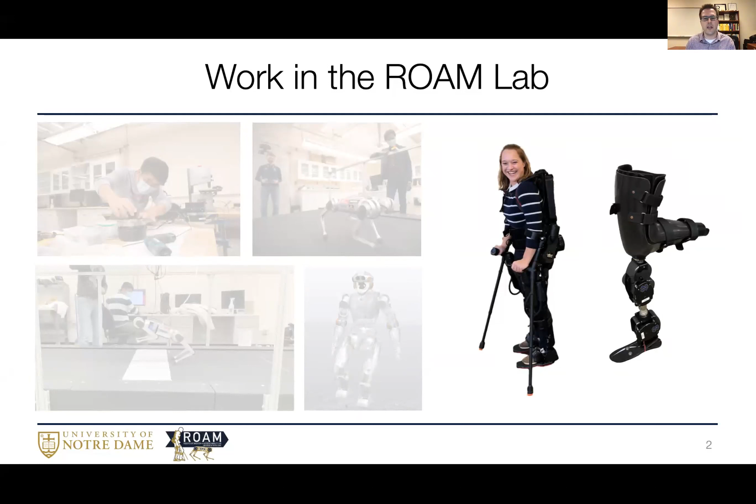Aside from both of these areas being united in the presence of legs, I think the challenges facing these systems are really representative of the ones facing our next wave of robotics applications more broadly. So if we think about the first wave of robots, perhaps the ones Karthik was working on at the beginning, these robots have made a phenomenal impact on the industrial assembly line, where they're complicated to control, but we really don't want them to be around humans.

They can be quite dangerous. We've seen robots more recently coming out into the real world, but most applications in what I'd call the second wave of robotics have been very much look-but-don't-touch by design. We have drones participating in inspection and surveillance, but hopefully not coming in contact with those objects, and very much likewise with autonomous vehicles, we don't want them to come in contact with humans.

This is very much in contrast with what I see as the next wave of applications for robotics, where we want these systems to be out in the world with and amongst us, helping to amplify and restore our human capabilities. So in terms of the challenges we face there, I see them as quite different, whether we're working with autonomous systems or ones interacting around humans.

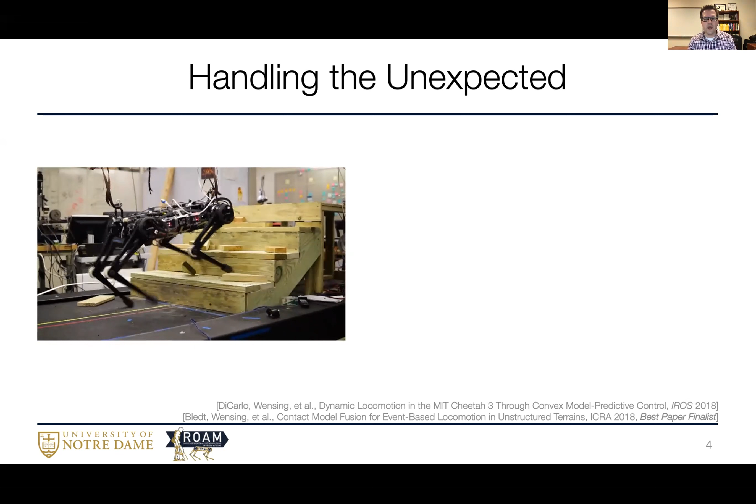So first, thinking about autonomous legged robots, I think the main challenge is just handling the unexpected and all the complexity of the environment out in the real world. We've made some phenomenal progress on this recently. Here, the unexpected for this robot is that it doesn't know these stairs are there, but the control policies and methods have been tuned up and trained so that they can work in this particular environment.

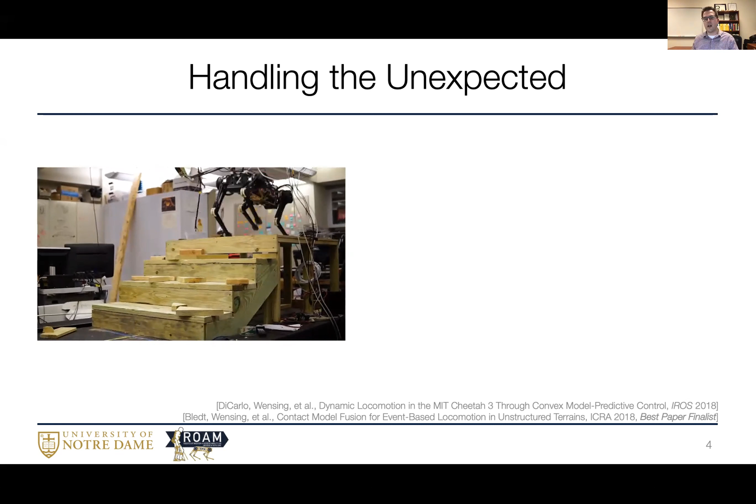But my overall hypothesis is that as we start to send robots out into the real world, whether they're supporting our troops, going to a disaster zone, the scene of a fire, or into our homes, we're never going to be able to prepare them for everything they'll see. Instead, our robots need to be able to reason through the consequences of their actions so they can devise creative solutions tailored to the situations they find themselves in. That's the main challenge and need for getting these robots out into the wild.

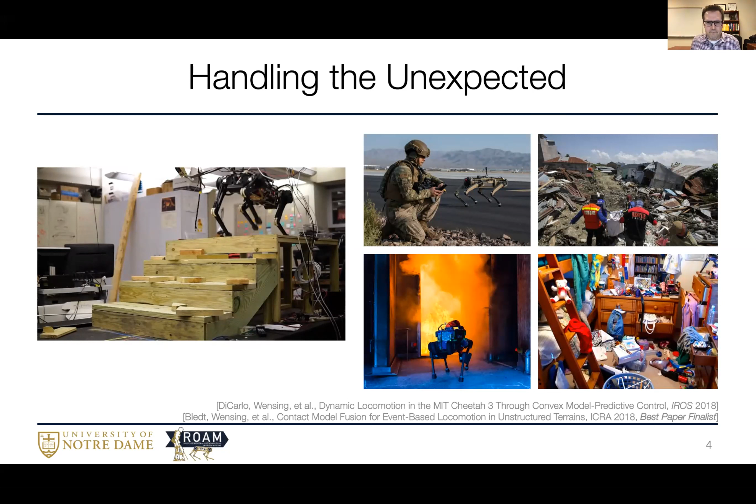I think it's very different when we think about human-robot interaction applications, and I think we have a bit of an inflated sense of the state of the art here.

Based on some of the things we see on the big screen, here's our friend Iron Man, and somehow his suit just knows that he wants to stop flying. It just knows that he wants to transition from walking on level ground to walking down these stairs to help him accomplish that. That's very much in contrast to the state of the art.

Here's one of the phenomenal systems we've worked with, the Ekso GT exoskeleton from Ekso Bionics. Here the motions just aren't quite as fluid, and that's because this device isn't really able to get into the mind of the human and pick up on their goals and desires as they walk through the world.

One of the challenges here is that everyone's gait is different. If you see your friend on the opposite side of the quad, you can tell it's them just by looking at the way they walk. So a challenge here is the variability from human to human, in contrast with the variability in the environment for the more autonomous technologies.

Today I'm going to talk through two different threads of work where we've begun to address these challenges. On the legged locomotion side, we'll look at a new way our robots can structure their prediction in terms of thinking through the consequences of their actions as they move through the world. Then we'll look at some work we've been doing on intent detection for assistive mobility.

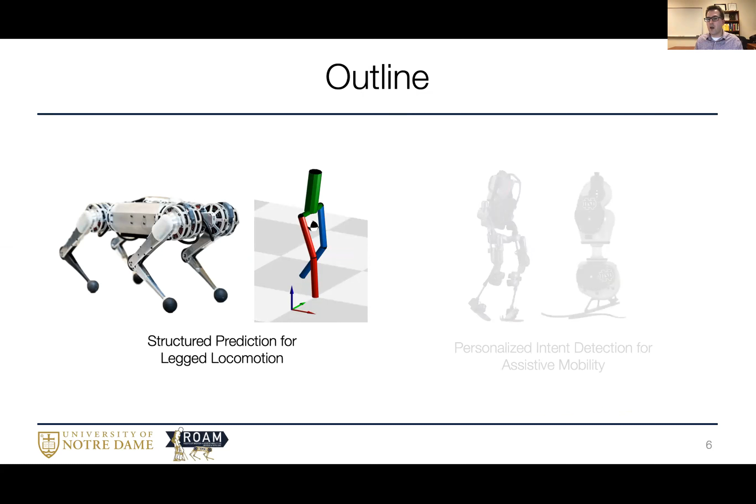We're using a control strategy known as Model Predictive Control, or MPC for short. Before I start talking about this, I want to give a brief intro into this way of approaching control.

Model Predictive Control goes as follows: you measure or estimate the current state of the robot, and then come up with a plan, thinking about how to get from where you're at to where you want to go. We formulate this as an optimal control problem posed over a hybrid system model for our robot, for which we've recently developed some custom numerical methods. We then follow that plan for a short period of time into the future, and repeat this process.

So if I look at my robot here on the left, this red trajectory represents the plan. The robot follows that for a brief period of time into the future, and then comes up with a new plan over and over again.

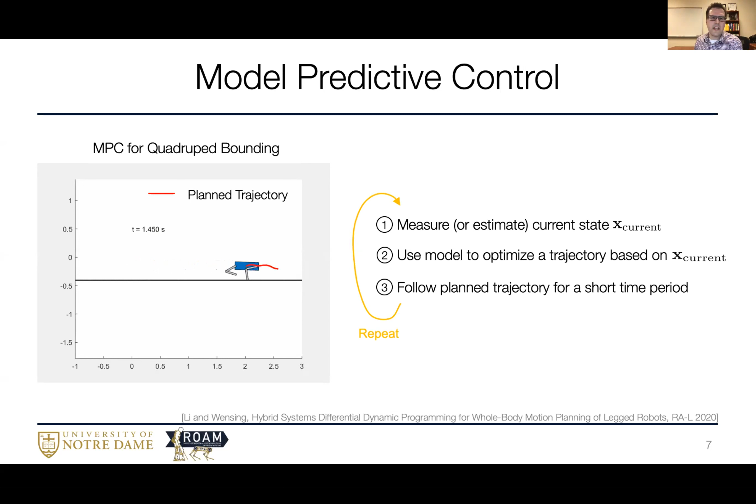So what's the state of the art in terms of model predictive control? Conventionally in the field, MPC is pursued in a hierarchical fashion where we solve a hierarchy of optimization problems. Let's say for a robot, it needs to come up with a plan for a long horizon into the future, thinking out a couple of steps, and that's computationally somewhat of a difficult problem.

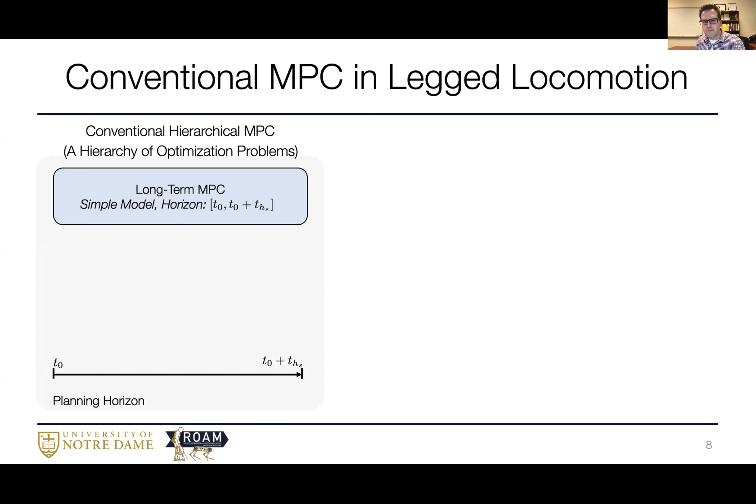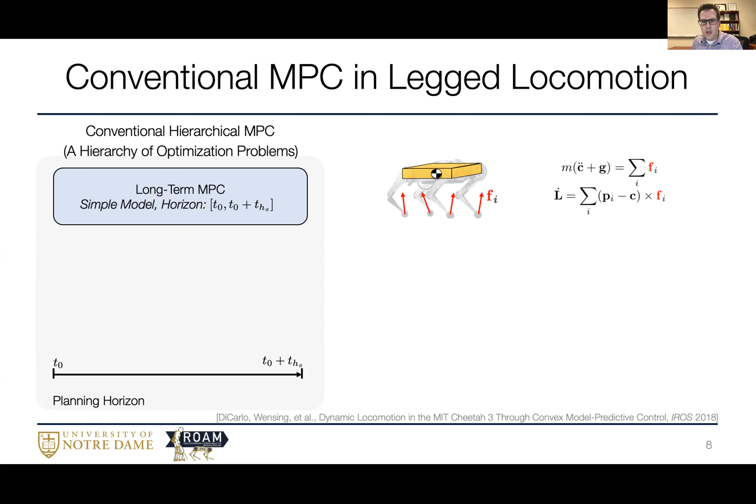So we often use simplified models of locomotion. As an example, in that video at the beginning with the robot climbing the stairs, we used a lumped single rigid body model. We thought about coming up with plans for how to apply forces underneath the feet to move this body through the world. That allows you to focus on the most important aspects of locomotion, but still leaves a lot of additional detail that you need to stitch in.

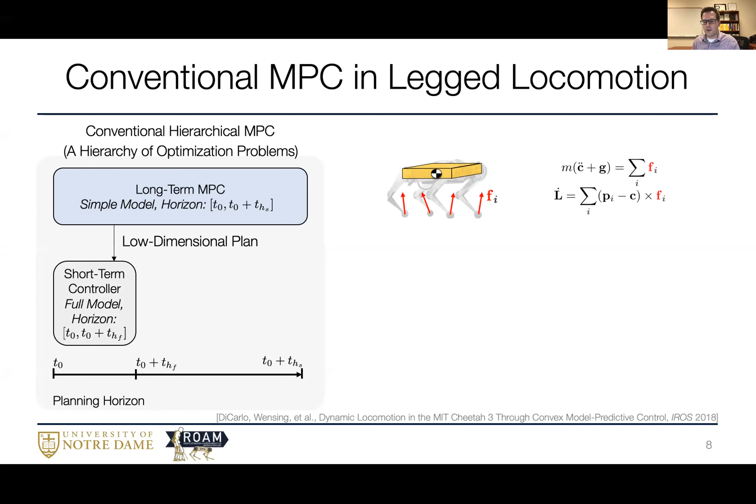This requires another optimization process or a controller to fill in those details. For instance, when climbing up those stairs, there were some swing leg trajectories that were heuristically designed along with an additional optimization-based controller to help track them. This works well in some isolated scenarios, but as you go into more complicated environments, some of these strategies break down, and you might need to think about reevaluating what type of model you're using. Frequently, we think there's an inherent trade-off when making that choice of model to use in our prediction.

So on one side of the spectrum for a choice that you could make, you could use a very simplified model, for instance, just thinking about how the center of mass moves through the world. The benefit of this is that by using a simple model, you can do quite fast computation over it.

But based on these simplifications or restrictions, you often have limited disturbance rejection in terms of the pushes that you might be able to recover from, or the terrains that you might be able to walk over as they shift under your feet.

You can, of course, add in a little bit more detail, for instance maybe considering the orientation of the body and thinking about how that's going to evolve into the future, or one that's become a little bit popular is this model where you think about the overall linear and angular momentum, or the centroidal angular momentum of the system, and think about the full kinematics. This is the model of choice that we've seen from the Boston Dynamics team recently with their humanoids.

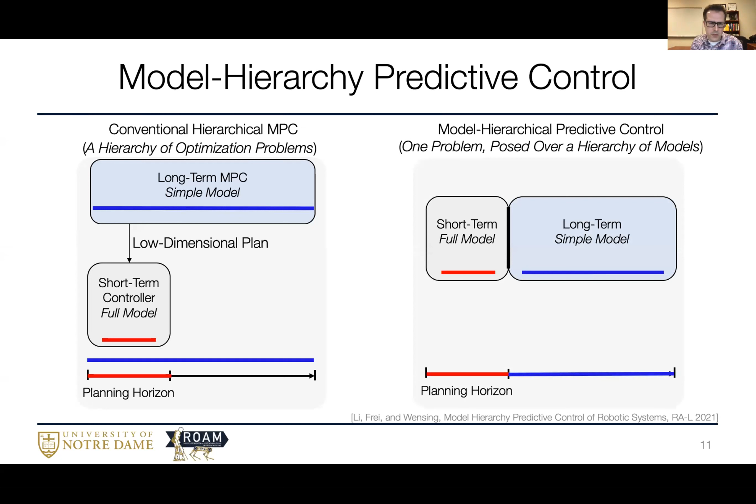Let me show you some of the results of this. So first, let's take a look at the two different ends of the spectrum, the simple model MPC and the whole body MPC. And I'm going to run some simulations where I'm going to put some disturbance forces on these robots as they try to run forward.

Let's take a look at this model hierarchy idea via comparison. Here we're doing the planning where the robot, for the next two gait modes, one stance and one flight, thinks about its full body detail and then uses that fuzzier, more abstract model to think about how things are going to go for the long term.

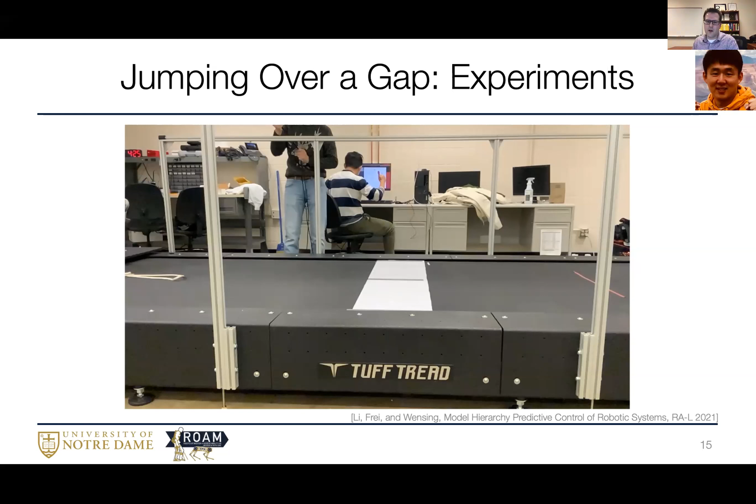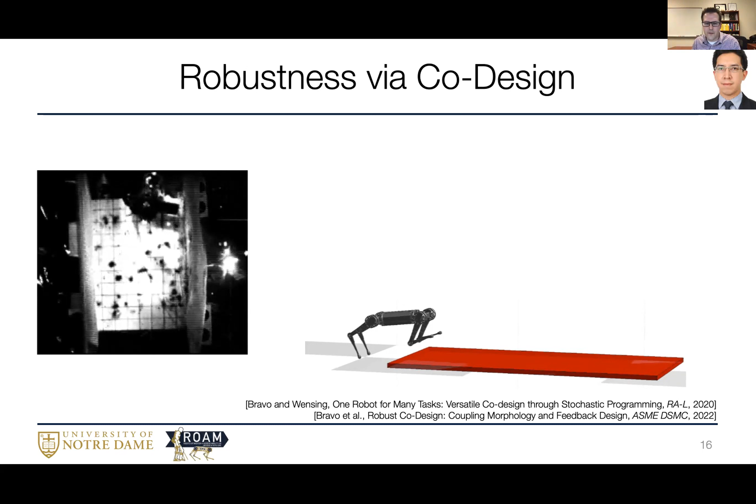So what we've been looking at recently with my student Gabriel Bravo is how we can look at design and control together, so that rather than just designing a robot and then handing it off to a control designer, we treat these problems together in order to ensure synergy between them.

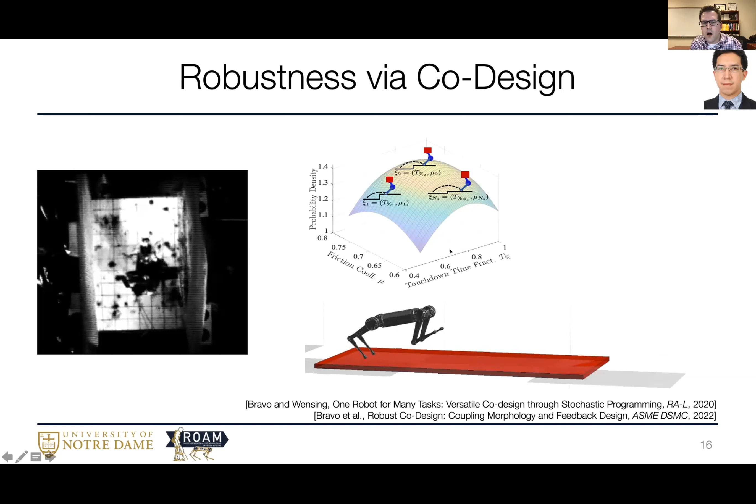So what we've been looking at is how can we design a robot so that it's able to handle all sorts of different types of terrain conditions, such that some of the response to those terrain conditions happens through kind of passive compliance that's in the mechanism. We've been doing this mostly in simulation, but we have some initial hardware that we've built and that we're just starting to test, and I'll look forward to reporting on that further down the road.

I wanted to include this as a little tie-in to what Laura is working on in terms of the importance of compliance and finding ways to engineer compliance into our robots.

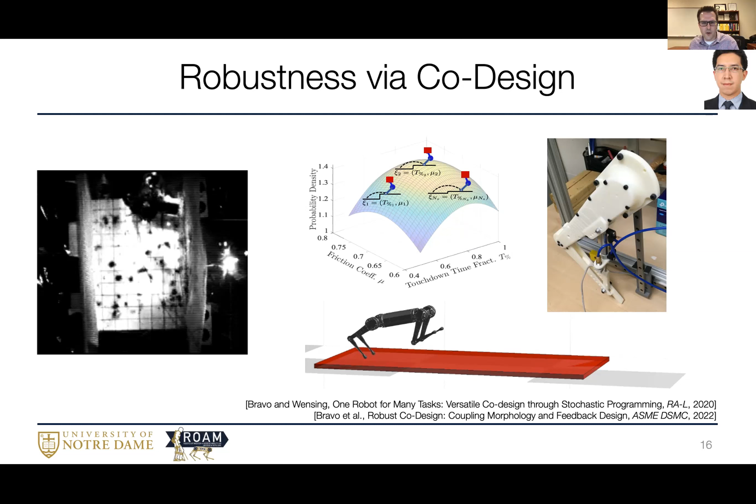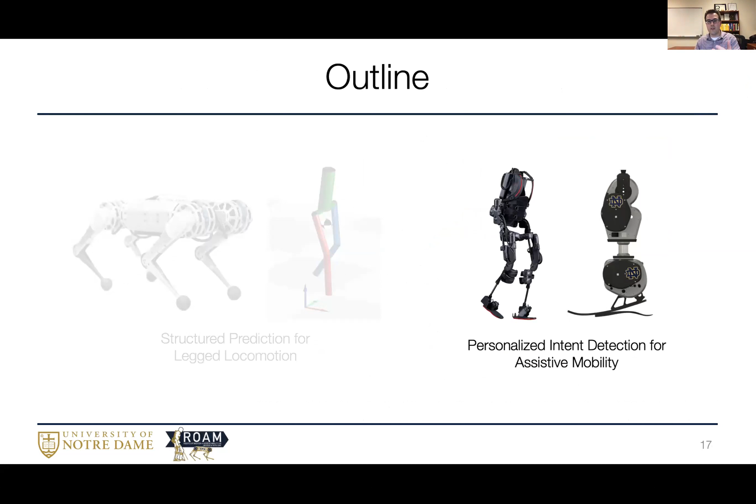Okay, so we've addressed this way for our robots to think through the consequences of their actions to handle more challenging environments. I'd like to shift gears and talk about how we can handle the variability from human beings that might be inhabiting our assistive devices.

So in terms of the state of the art for rigid exoskeletons, this is kind of what it might have looked like in rehabilitation before exoskeletons were available, with physical therapists manually manipulating limbs to move them through gait.

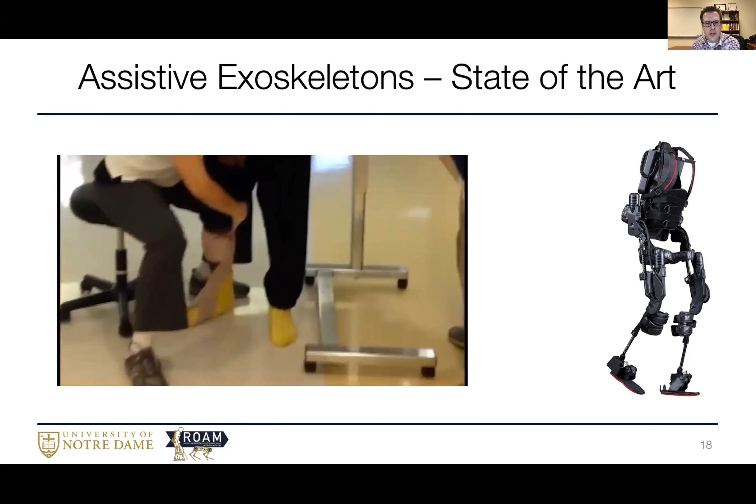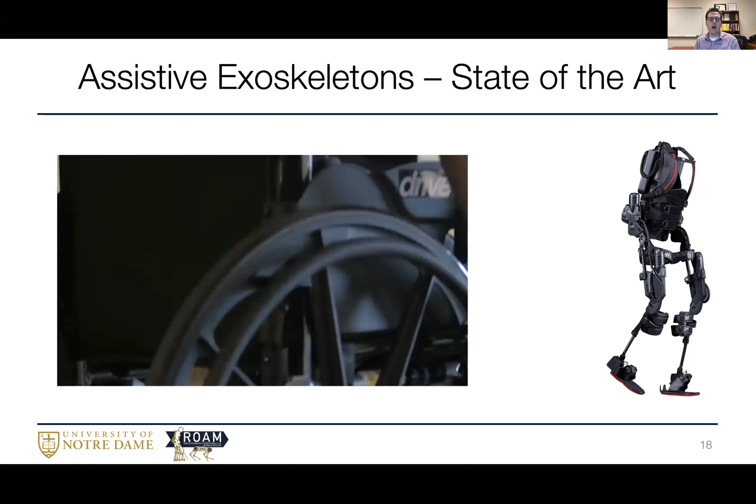Now, with the use of exoskeletons, we can reduce the burden on therapists. We need fewer of them, it's less taxing, and it can produce more repeatable gait patterns during rehab. The end goal here is that we'd like these devices to be able to go home with people and out into the community, so that they can interact with the community from a standing posture as opposed to from a wheelchair.

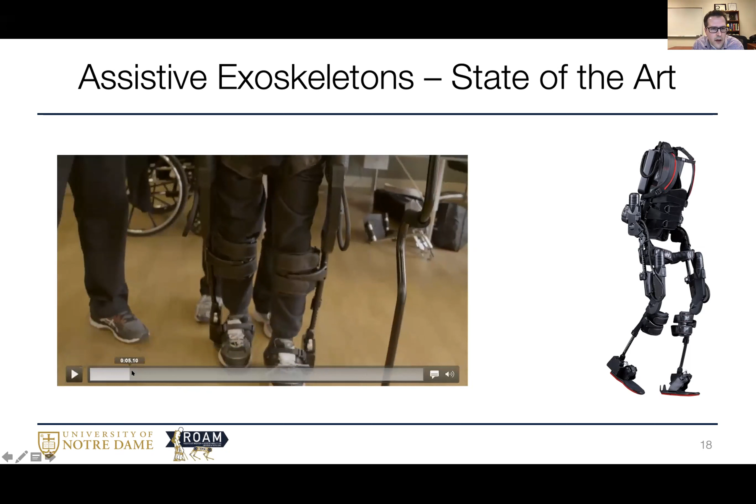One of the challenges with these devices is, here you can see this therapist is holding a pendant, and anytime a change needs to be made to the gait, she's keying that into the device.

Instead, what we'd like to be able to do is pick up on small changes in your motion that might telegraph changes that you want to make to your walking speed. We're doing that by looking at sensors that are already on board the exoskeleton, in terms of angles of hip and knee motors, as well as currents of those motors and contact sensors under the foot.

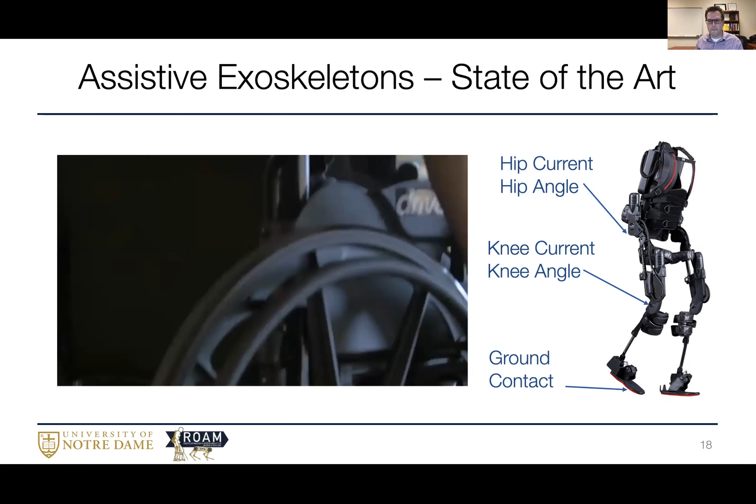So we have an open source data set that we've been using to conduct our studies. And if you're interested, I hope you might use it too.

This was a study conducted by my student, Taylor Gambon, with our industrial collaborators at Ekso Bionics. Taylor ran a study with 6 subjects, 3 uninjured individuals and 3 with an incomplete spinal cord injury. She had them walk through this mocap arena and commanded them to either speed up, slow down, or make no change in their gait.

We monitored all those sensors on board the suit and have made that information available as part of an open source data set that's associated with Taylor's recent IEEE Access paper. So I encourage you to take a look if you're interested in this area, and if you have any questions, please feel free to reach out.

So again, our goal is that we'd like to be able to use these sensor readings that we've collected in order to estimate that the user has made a change in their desired walking speed.

So if I think back to the first part of the talk, these simplified models we were using to plan locomotion were often focused on figuring out what force is being applied under the foot at a specific location. The reason being that when you select a footstep, you're stuck with it both now and into the future.

So our hypothesis was that choices of ground contact would carry a great deal of information regarding the intent of the individual. In particular, we were motivated by recent work that showed that changes in step length are well correlated with changes in gait speed from step to step.

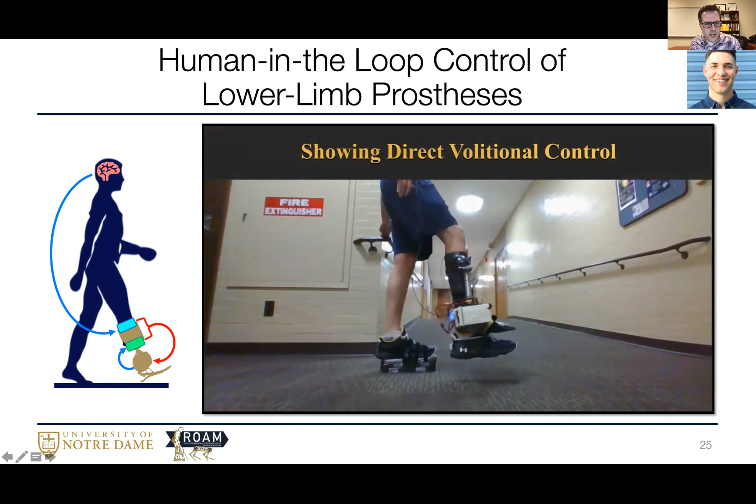In the past, a lot of control strategies have either been purely autonomous, taking feedback from the prosthesis itself, or purely volitional, taking readings from an EEG skull cap or EMG sensors on board the prosthesis. So what my student Ryan Posh is looking at is how can we combine these two together?

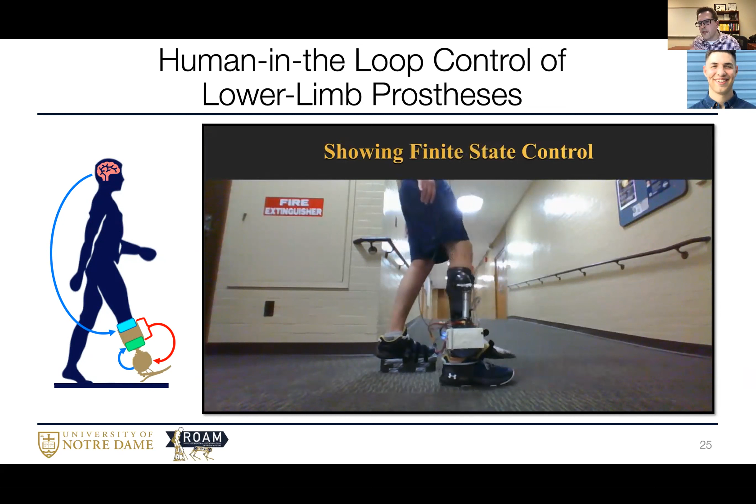So if you just want to walk on level ground, you don't have to think about it. You can let the autonomous controller take care of it. But if you want to do something special, like stand up on your tiptoes, you have the flexibility of doing that. Ryan's done some great work on this, right at the beginning of some human subject studies on it. I look forward to telling you about down the road.

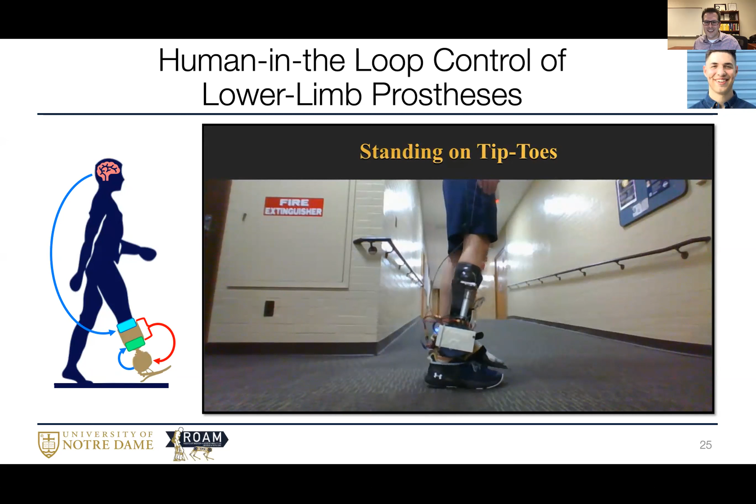Zooming back out, as we look to send our robots out in the wild, for our autonomous legged robots, managing the complexity of the environment and having ways for our robots to think through the consequences of their actions is a real challenge we've been taking a look at. And for our assistive devices, I think the main challenge comes from the variability of the different humans using it. I'm excited about some of the recent work we've done there as well.

So with that, thank you for your attention. I'll thank my funding agencies, and I'm looking forward to Laura's talk.

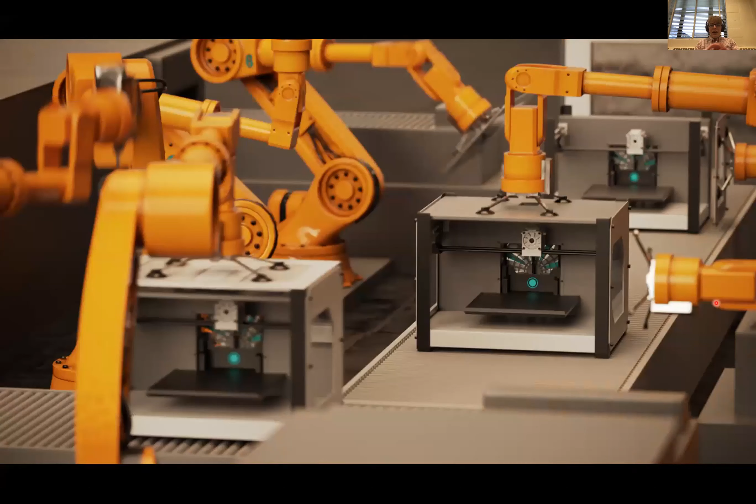So we've already seen a lot about more traditional rigid robotics. Patrick had a great intro on where robots have gone, looking from traditional factory robots like this. But I also like to start from that kind of perspective when talking about soft robots. Soft robots are coming into this existing field of robotics where we have a lot of robots that are really, really good at doing precise, repetitive tasks. These robots are not friendly for humans to be around, but they are very, very good at what they do.

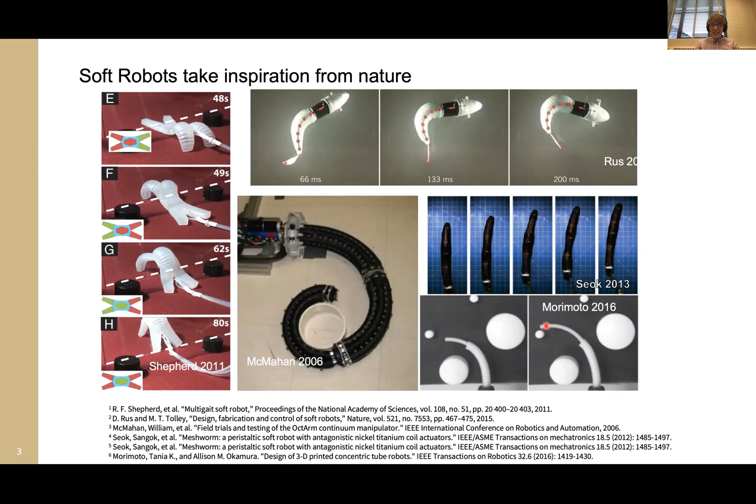Now, all of the systems here are taking their inspiration from the animal side of nature. So I'd like to briefly say that there's a wide range of natural morphologies left to be explored, which I think are really interesting for soft robotics as well.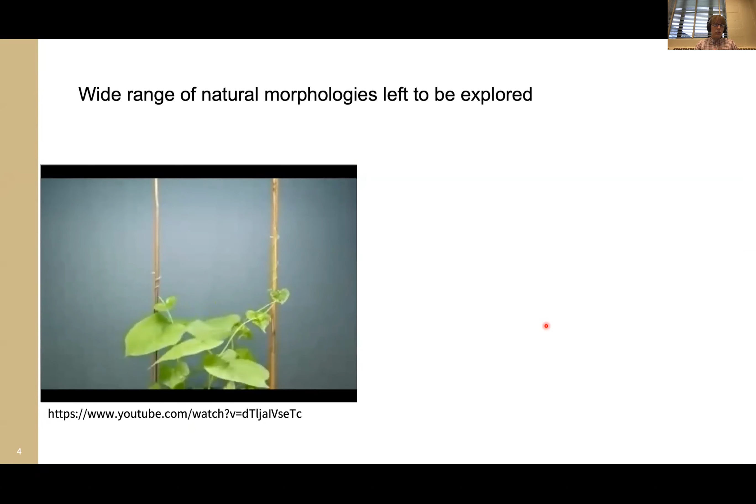Again, this is a behavior that is in the morphology of the vine itself. There are some chemical changes when it actually does find this structure to grab onto, but for the most part, it's kind of just repeating this behavior, and the morphology is what allows it to grasp this structure.

And then we even have very weird systems, right? These are slime molds. If you've never seen a slime mold before, they're very odd creatures, but they have interesting movement capabilities based off of their bodies. So this is just to inspire that there's lots of new directions to go, and this sort of building that we've been doing with soft robotics into these kind of animal forms is not the only way we can go.

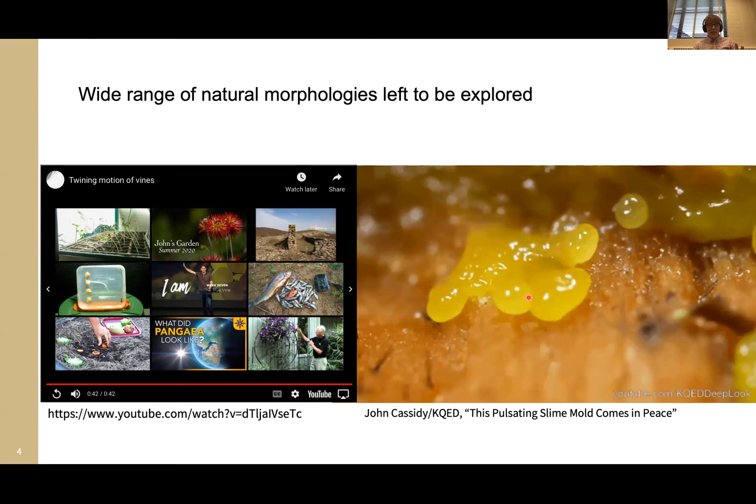Okay, so I'm saying that that's not the only way we can build soft robots. So how do I propose we do design soft robots? What should we do if we're not just going to imitate animals, or if we're not just going to kind of make rigid robots but compliant?

Well, for me at least, it starts with acknowledging this high link between morphology and behavior of soft robots. And as a result, our primary tool that we're going to look at using is modeling. As long as our models are simple enough, Patrick talked a lot about this in model predictive control as well, how the complexity of the model changes how you approach things.

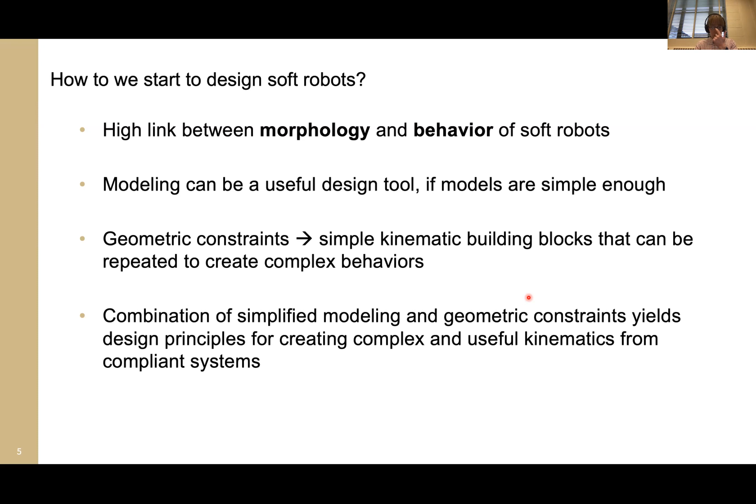But for us, if our models are simple enough, that makes modeling a good design tool. And the models I'm going to look at specifically are models that pull from geometric constraints. By using these geometric constraints, we're going to build simple kinematic building blocks. You can think of this akin to the joints that you have in a rigid robot. We're going to use these building blocks repeatedly to create complex behaviors, and the goal is that this combination of modeling and geometric constraints can yield design principles for creating complex and useful kinematics.

Okay, so with that as a sort of intro to the work I'm going to be talking about, here are the 3 little projects I'm going to go through that kind of build off of this designing soft robots through geometric modeling. So let's talk about this first one, design of soft delta mechanisms first.

Here we are going to start with the kind of easiest approach to design through these building blocks, which is we're going to take a 1 degree of freedom actuator. Here we've just got a little pneumatic actuator. It is a bellows actuator, bellows based off of the shape, and it's got a linear behavior, relatively linear behavior with pressure. You can see it extending here, this single degree of freedom.

Just to give a little bit of background on these actuators, they are 3D printed. We've done these a few different ways. We've done multi-material printing through PolyJet, which is the Objet printer, and then SLA printing from Formlabs.

The big benefit here, at least for soft robotics and for modeling, is that they change length primarily through bending, as opposed to primarily through stretching of the wall material. The reason why this is a big benefit is that these elastic materials can have very nonlinear models when we talk about straining them, but here through bending, we're not creating a lot of strain of the material itself. We are mostly creating strain in the actual structure.

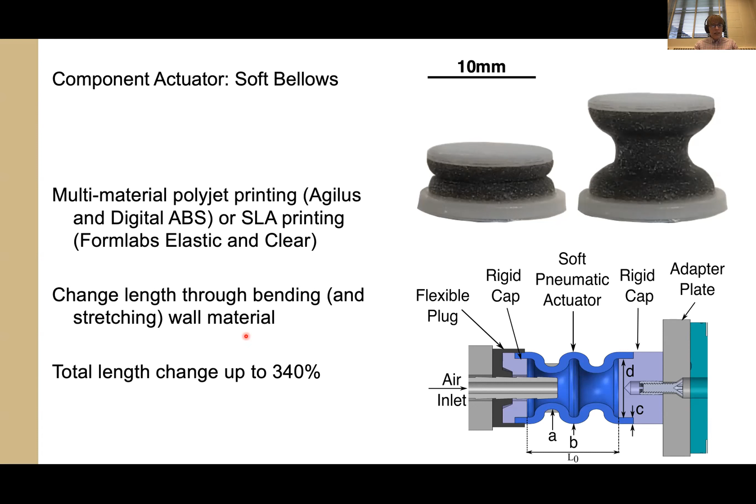As I said, to cut to the chase, we get very nice linear behavior out of these bellows. So here is pressure versus length, and over here we have pressure versus force at different lengths. So we have this nice linear actuator based off of pressure.

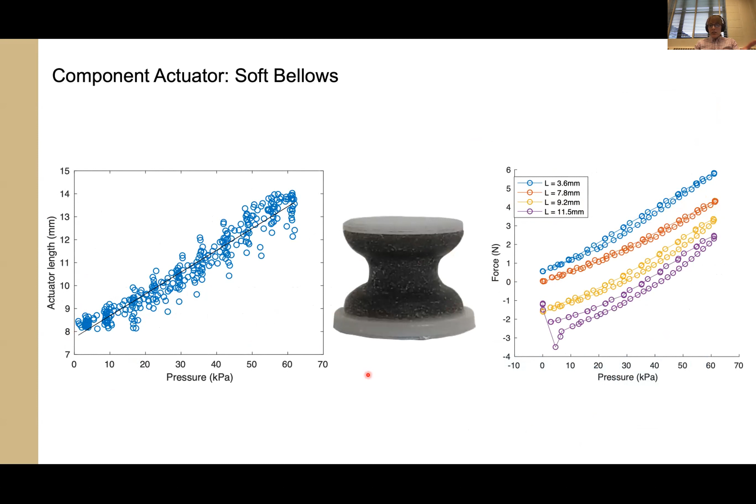And so immediately we think, let's build something more complex with this. So let's take 3 actuators, put them into a structure together, and we can get a little compliant delta mechanism. If you've ever seen or tried to work with the kinematics of parallel robots, you might know that usually they're a lot more complicated than this, but here we just turn on different actuators and we get this center point to move about in space.

Where does the modeling come in then? Well, I'm going to cut to the chase, cut out a lot of the experimentation and math, just to get to the results here.

When we look at this system and just talk about the force workspace, we're going to hold this point in the center constant. The output force we get is just a linear combination of the forces of the actuators we have. This makes sense because it's just a force balance equation. We can see that essentially we get preferential force direction aligned with the actuators.

So it's a little easier. We have less total pressure needed to get to a point aligned with one of the actuators, as opposed to in between the actuators where they kind of have to work together and we get a little bit of lost energy.

This scales very well, so we can take the same design and the same model for our actuator and scale it up to 250% in size. If we look at the max force output, we can see that scales as well. Here we get a max force of 4.9 newtons, and here we get 28 newtons of force out of a 250% increase in size. So that's nice as well.

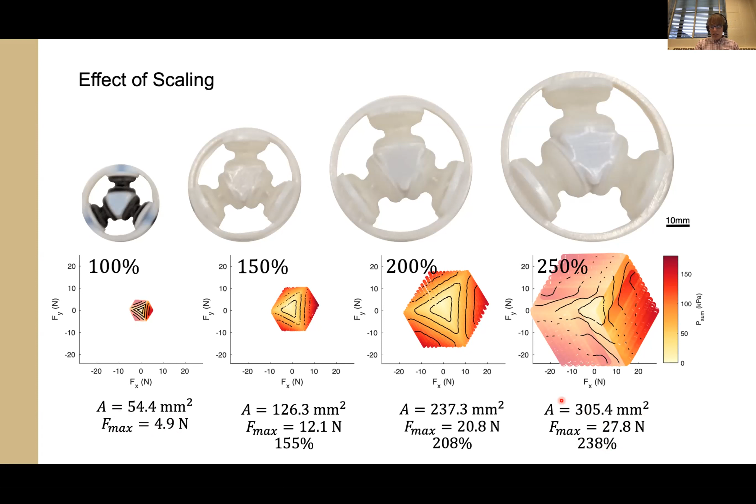I've been talking about force though, but when we go back to this video, we see this point actually moving around in space. So what if we want to model that part of things? Can we just use this linear combination model? Well, the answer is yes and no.

It kind of comes down to what we're seeing here, which is shear. We're shearing these actuators in addition to linearly extending them. And so those linear models we started with are not going to be enough now. We need to add in shear.

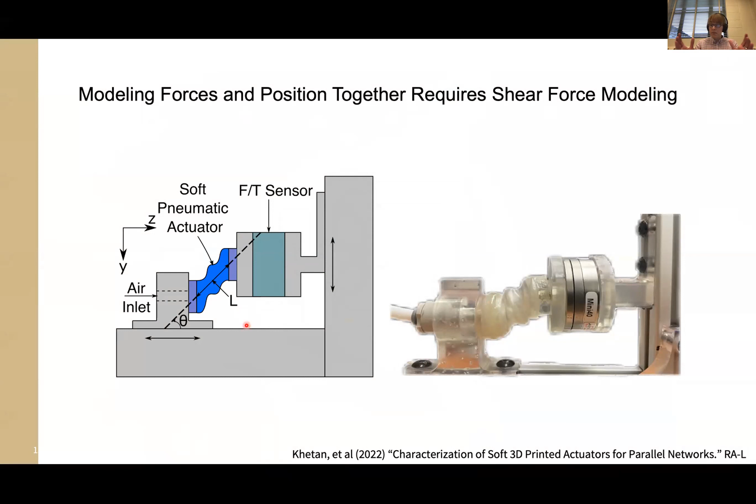So now we're going to model both forces and positions together by adding on some shear force modeling of these single actuators. Again, we're only going to be looking at the single actuator as our building block, and we're going to use that to predict the behavior of multi-actuator systems.

So we get a variation of axial and shear forces as a function of both the pressure and the deformation.

To model this, again, we want these kind of simple geometric models. So we're going to take two approaches. One part of our model is based off of the shear angle changing the pressure, the effective area that the pressure is acting on, looking at it as this sort of deforming tube. And then we have one which is sort of a linear combination of torsional and linear springs to describe the deformation behavior.

So if the model we had before was something like this, where we had just forces in the linear direction based off of pressure and scaled based off of our delta L with no consideration of shear, our new model looks something like this. So it's not linear anymore. We've got some theta squared and delta L times theta, but it's still relatively simple overall with our linear stiffness and our torsional stiffness and then our pressure.

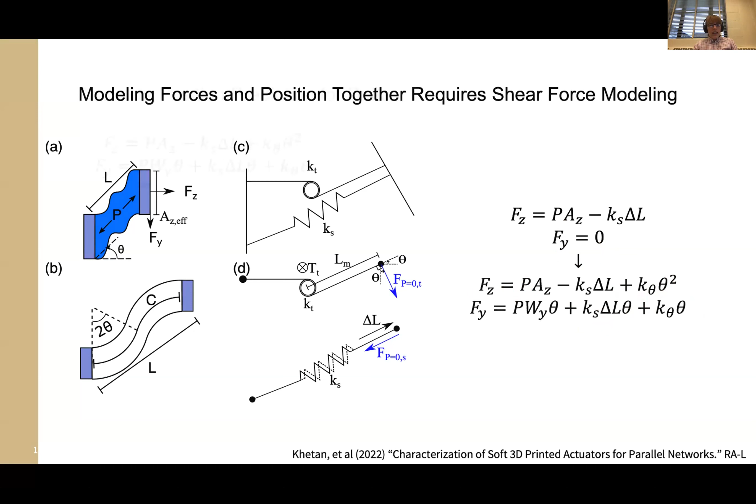And if we take this model and we build our delta again here, now we can look at whether we can predict the output position based off of the input pressure. Long story short, again, so I can get onto some of the other topics, the answer is yes, and it works better than just our pressurized spring model from before, where we're just considering the axial forces.

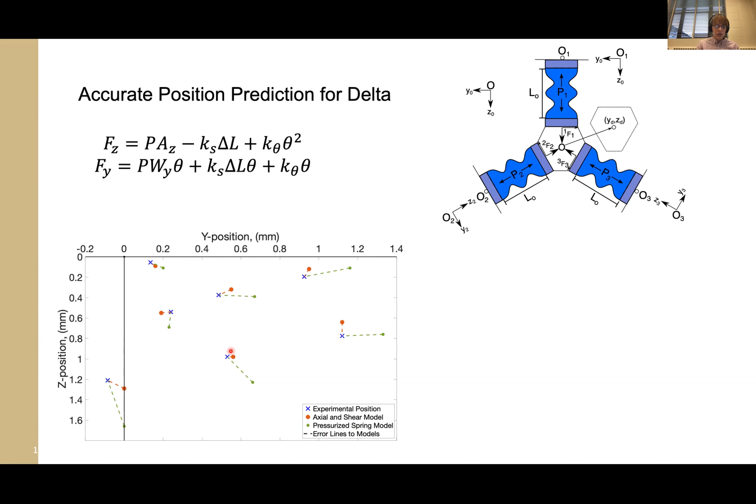Here we can see the orange dots are our new axial and shear model, the blue crosses are where the position actually ends up, and the green dots were our previous model. So we get an overall average error of about 3.5%, which is really, really good for a soft robotic system if you've ever worked with a soft robotic system.

So this is how we would build from building blocks like single actuators. What if we're trying to describe the behavior of a full soft robot? Can we take this approach of compartmentalizing and tearing apart the pieces and building up a geometric model like that?

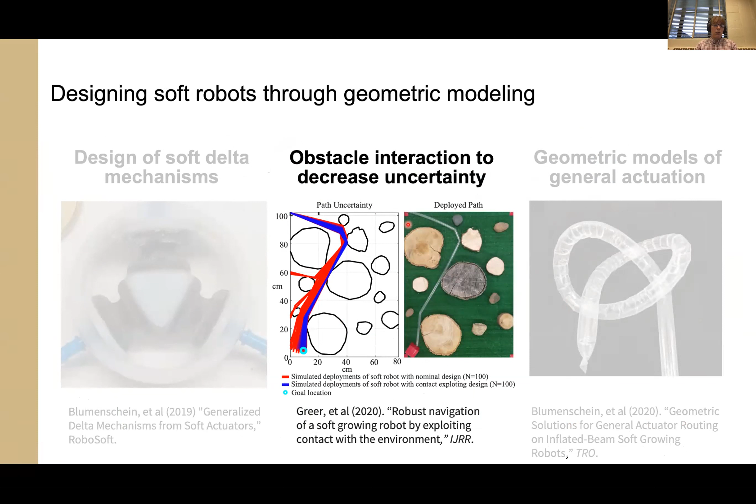So to answer that question, let's go on to the second topic, which I've titled obstacle interaction to decrease uncertainty. The theme here is looking at heuristic behaviors of soft robots in order to build these building blocks of our behavior.

To describe this section and the next section of work, I'm going to introduce the growing robot we have here. This is the main interesting new degree of freedom that we have with the growing robot, which is this extension using pressure and growing from the tip. Overall, the body of the robot is very akin to a continuum robot where we have this long, slender body.

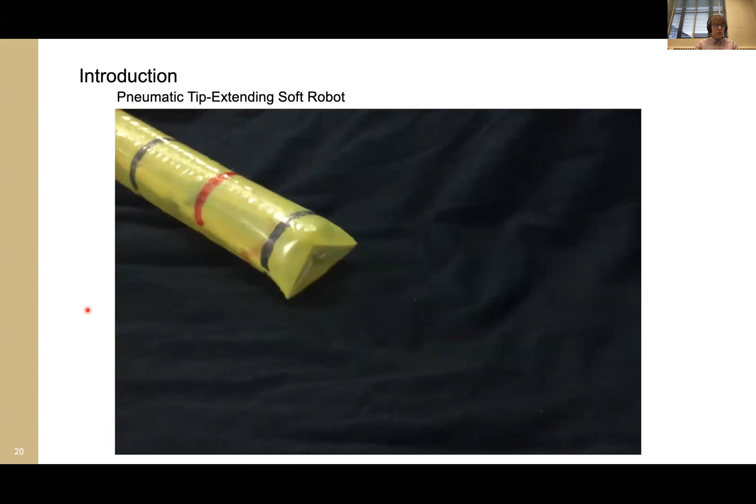If you're unfamiliar with the growing robot, let's click on some of the videos here. Can't seem to get these videos to play.

Some of the benefits of the growing robot here is that it has a lot of nice interactive behaviors with its environment. So if these videos would play, you would see the robot is able to grow through these incredibly sticky structures. It naturally navigates around bends, grows through very small gaps, and it can even do some digging if we give it a little bit of extra air pressure.

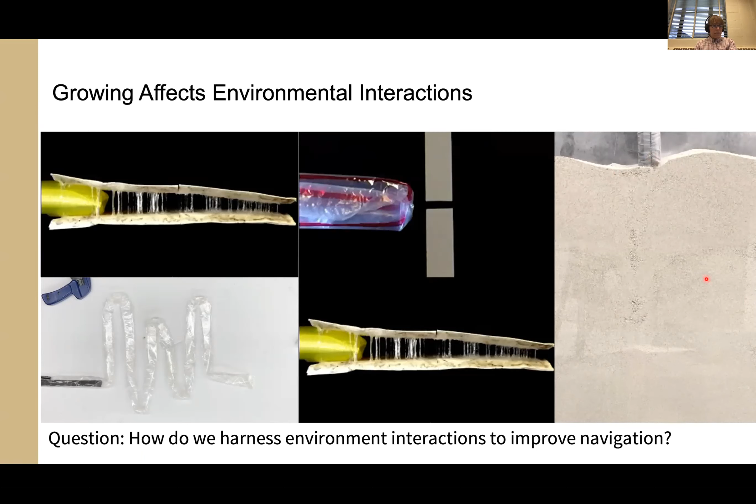So a question we might have is, how do we actually harness these environmental interactions? We can do that by observing a really nice heuristic behavior when we interact with an obstacle in our environment. We grow into an obstacle, the tip of the robot moves tangent to the obstacle, and then we have a pivot back at the base, wherever we most recently contacted an obstacle.

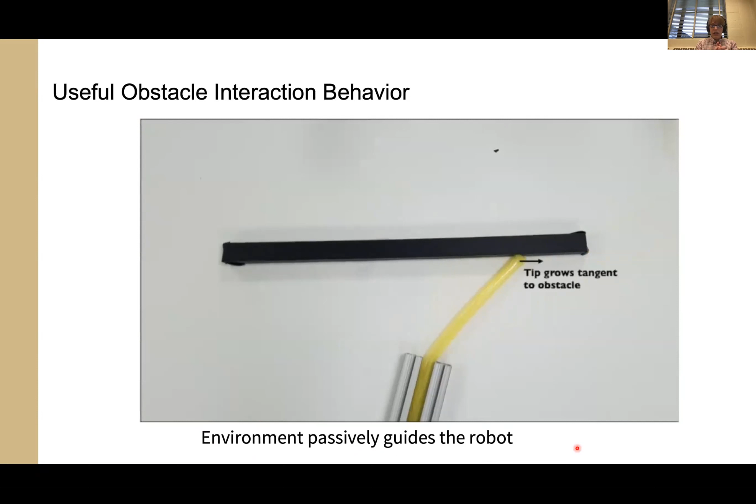Again, tip grows tangent to an obstacle, pivot at a previous constraint, and we grow until we leave the obstacle, at which point we just follow whatever direction we're growing. This means that our environment will passively guide the robot. A lot of times, if you've heard of this in soft robotics before, people refer to this as morphological computation. It really just means we're seeing an interesting or potentially useful behavior from the natural response of the robot.

The heuristic we come up with is very simple. It just depends on the initial contact angle, right? That's going to tell us which direction we're going to grow. So if we hit it at greater than 0 degrees, positive interaction angle, we'll go one direction. And if we hit it at a negative interaction angle, we'll go the other direction. And that's essentially it for the model.

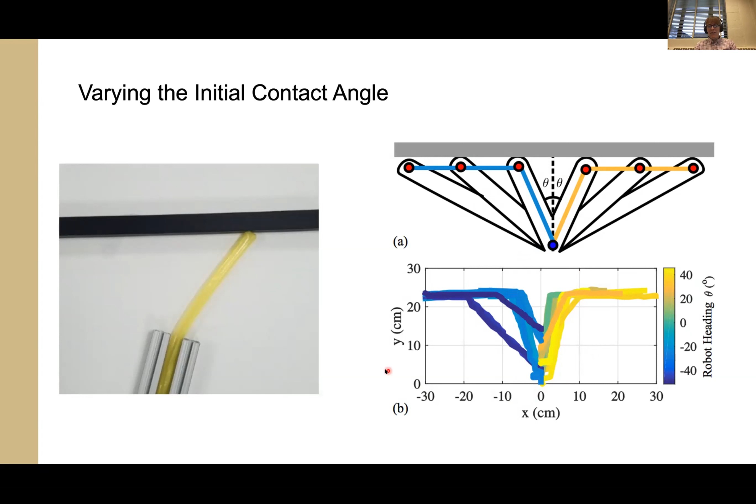Now this gets a little more complicated when we think about all of those previous contact points we have, but not too much more complicated. So we just need to define these pivot points where the robot could pivot about. There's two types we'll define: ones that are based off of obstacle contacts, which is what I've shown previously, and ones that are made based off of pre-made turns that we build into the robot ourselves. So that's something akin to this. And then as we have more obstacle contacts, we're going to add those into our potential pivot points, or our potential obstacle contacts that are deforming our system, like this.

So just talking about the steering real quick, how do we actually do that? Well, we're just shortening one side of the material, which gets us a turn as we grow. So that's all we mean by those design pivot points.

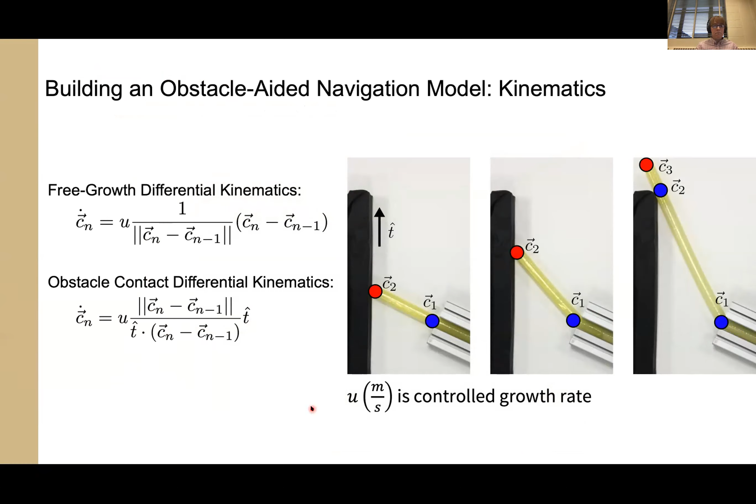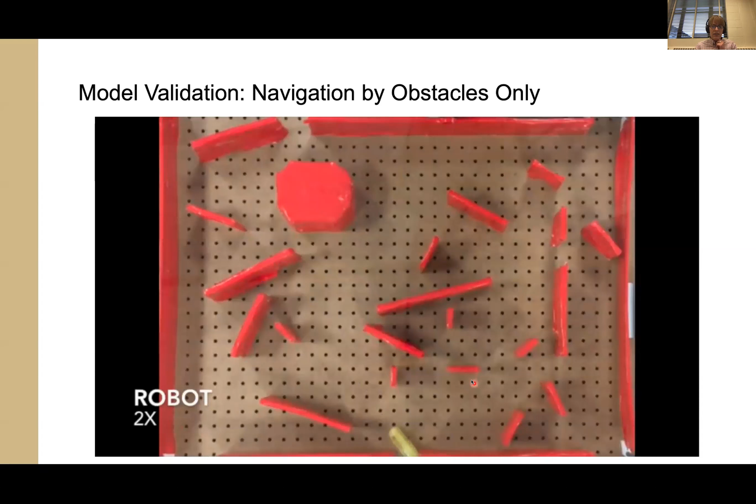So obligatory math slide, this is what the kinematics come out to then. Just in terms of what we see, we have one kinematic equation to describe when we're not in contact with an obstacle, and then another one describes following the tangent of that obstacle as we grow along it. So if we actually take this behavior and look at a cluttered environment like this, we can see that it well predicts what we are doing in the environment, as we see here.

And the outcome here is we want to use this for design. The design strategy is to use this to reduce our error overall. So we know we have some amount of error potentially in our robot, and if that error gets big enough, we could have this kind of chaotic bifurcation where the behavior of the robot naturally goes in a direction we don't intend.

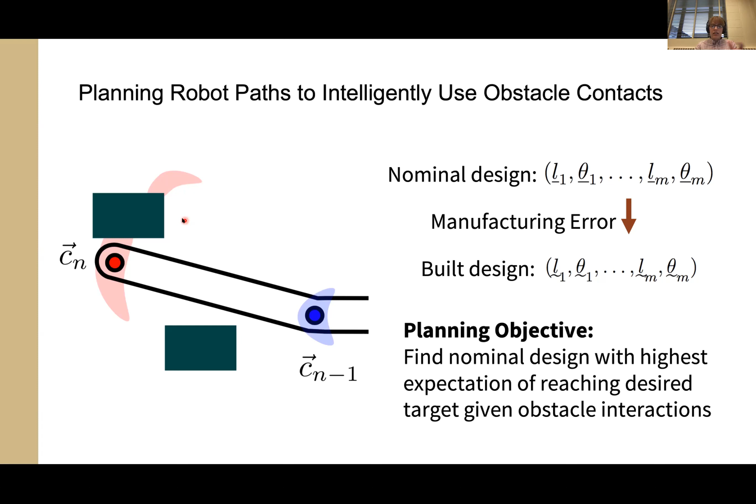So we want to plan in a known environment to reach a desired target while taking this potential uncertainty into account. The results look something like this: given a target location, we plan out a series of turns and intentional obstacle contacts that get us to a desired target in space with some amount of accuracy. This is all open loop, so there's only so accurate the target hitting can be, but these are very nice results for just a tube growing into space.

If we simulate this, we can see that compared to traditional robot planning, where we avoid obstacle contacts, intentionally using obstacle contacts actually reduces our uncertainty overall.

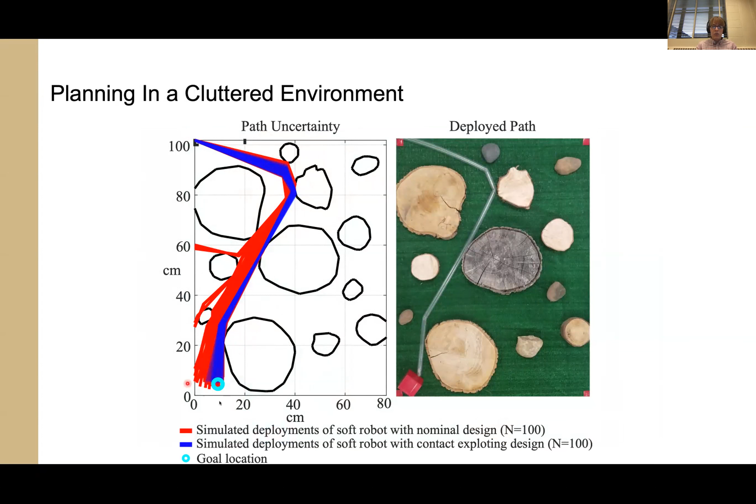Okay, to keep inside of the 25 minutes, I'm going to move on to this last topic here: my promised question, can we tie a robot in a knot? I've already kind of given away the answer with that picture there, but let's talk about how we actually get to tying a robot in a knot.

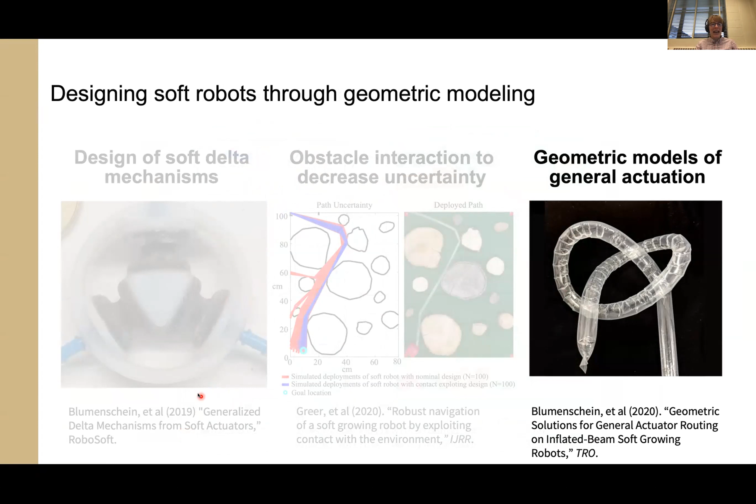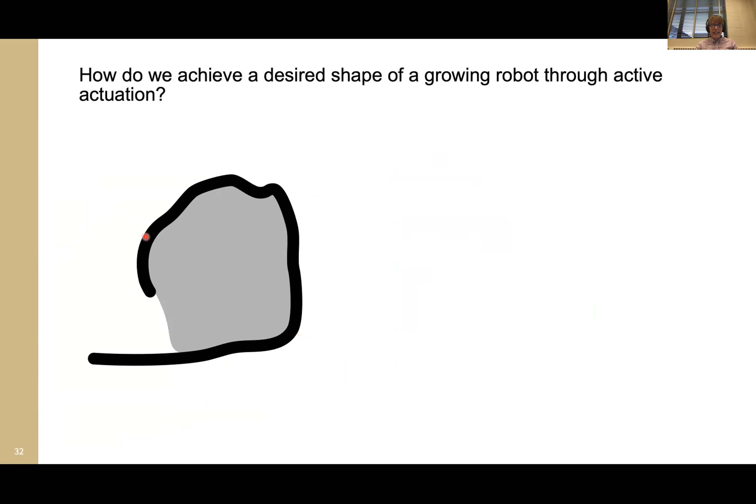So we're going to be with growing robots again, but now we're going to add active actuation to get a desired shape in space. So maybe we want to wrap around an obstacle, or as I said, maybe we want to do something like tie a robot in a knot so that we can grasp onto something in our environment.

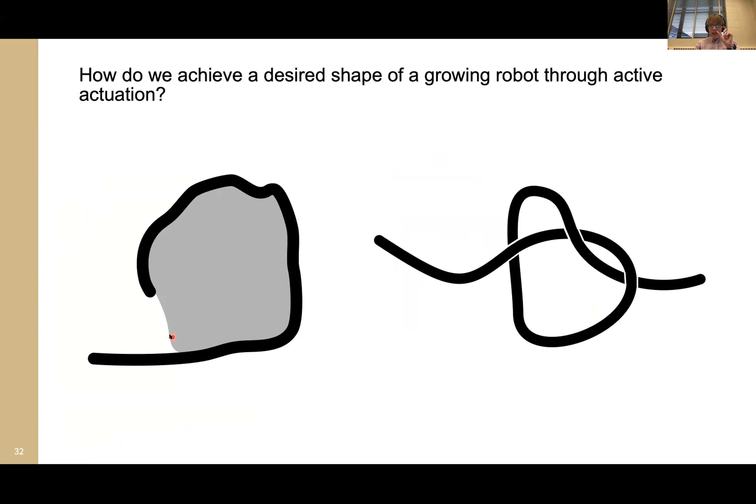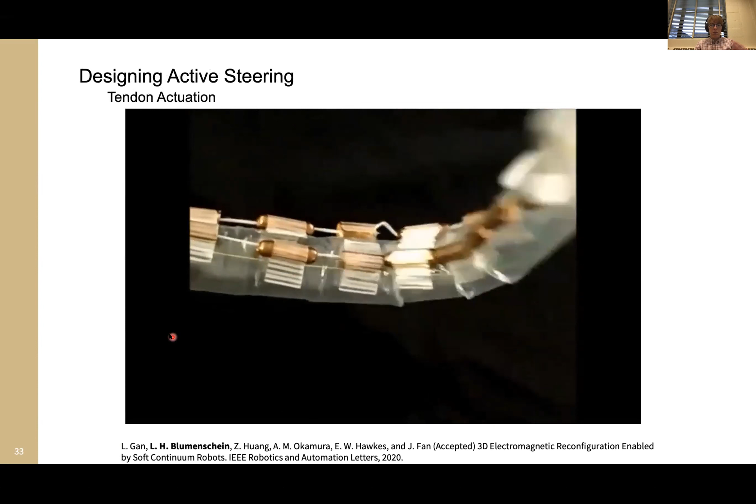The small addendum to do this is we need some way to actively control our shape. The two ways we do that are either through tendon actuation, shown here, essentially pulling a string and collapsing these little pieces along the length to control a shape, or pneumatic actuation, series pouch motors, which essentially get shorter as we add air in. This allows us to steer the robot in space.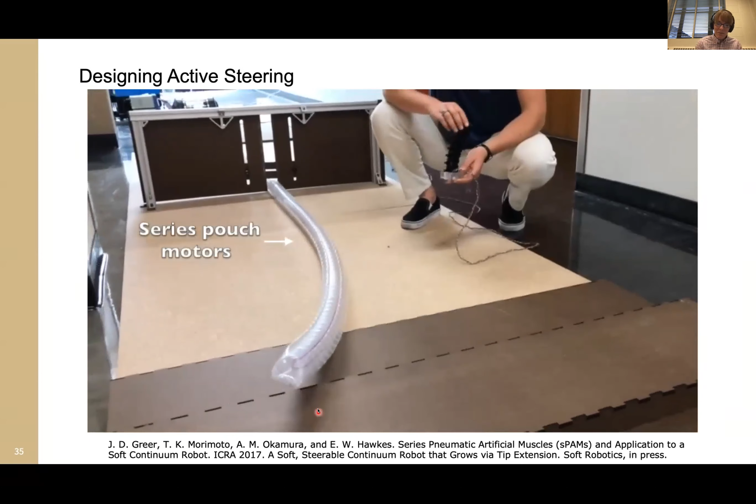This is a previous colleague, Margaret Coad, who I believe is in the audience right now, who is steering the robot here, using the pouch motors to steer it back and forth.

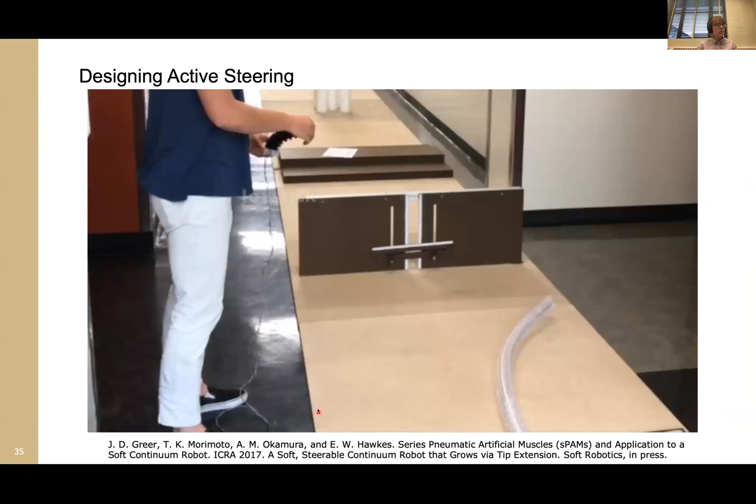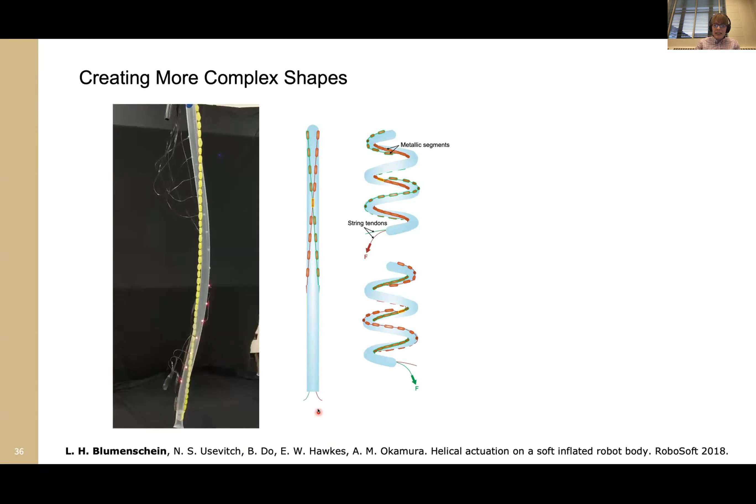So we want to create more complex shapes. What are we going to do? Well, we're going to start again with a building block, and our building block here is going to be a helix. It's pretty easy to make a helix—all we have to do is wrap our actuator in a helix around the robot, and we get a helix out. We use a helix as our base shape because it gives us a variable curvature and a variable torsion, which we then can use to make a wide variety of shapes.

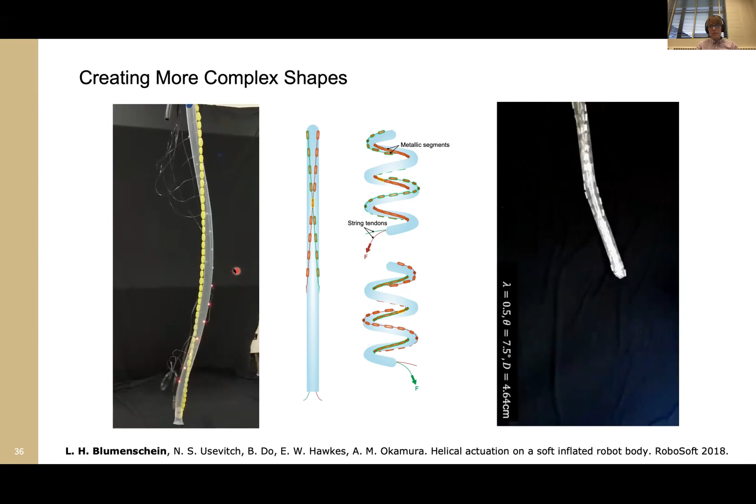But we're not done by just choosing a helix—we actually have to figure out the kinematics here. We want to know, based on this initial shape of our actuator, defined by some variables, what shape of the robot we get. Long story short, cutting to the obligatory math slide, we're actually able to find closed form kinematics for this, which is really nice.

So now we're going to take this and generalize it beyond helices by stacking a bunch of helices together. We're going to change one of the parameters over time, and we're going to get a more interesting shape. If we do that at a fine enough resolution, this interesting shape can become a wide variety of shapes that we want it to.

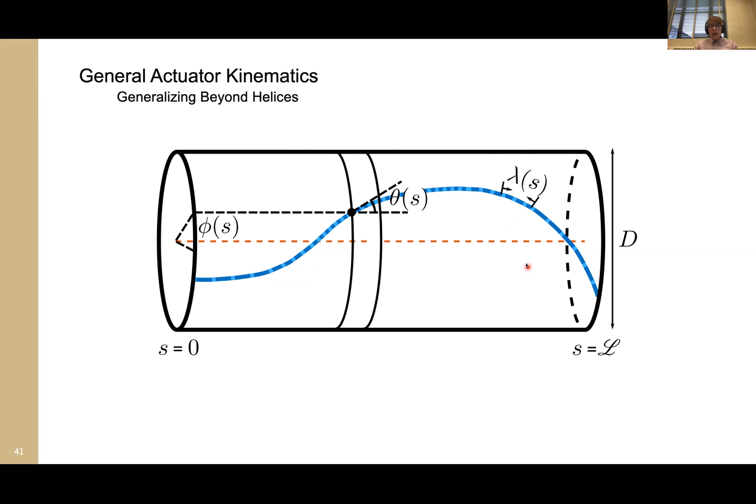So in the interest of time, I'll briefly show the results here. This is one shape that we've got.

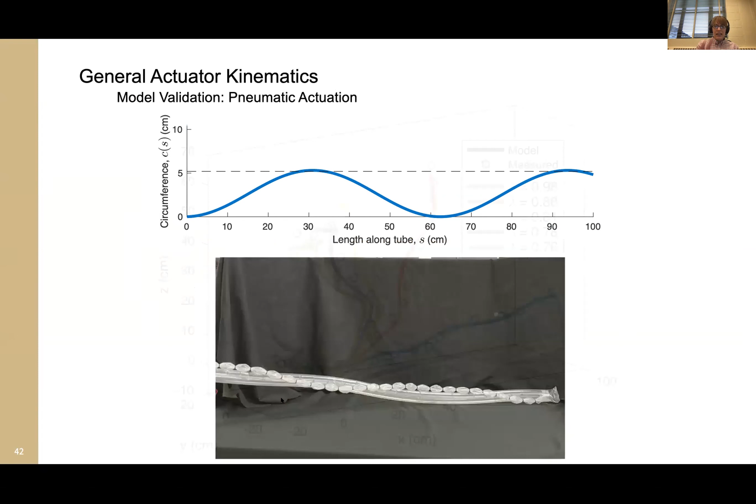And again, our model predicts well that shape.

Let me go to, so we can use this then to design with a lot of kind of maybe a little less intelligent optimization than Patrick was talking about, but using some of the optimization toolkits, we can find a shape that allows us to match a shape that is desired, like something like tying a robot in a knot.

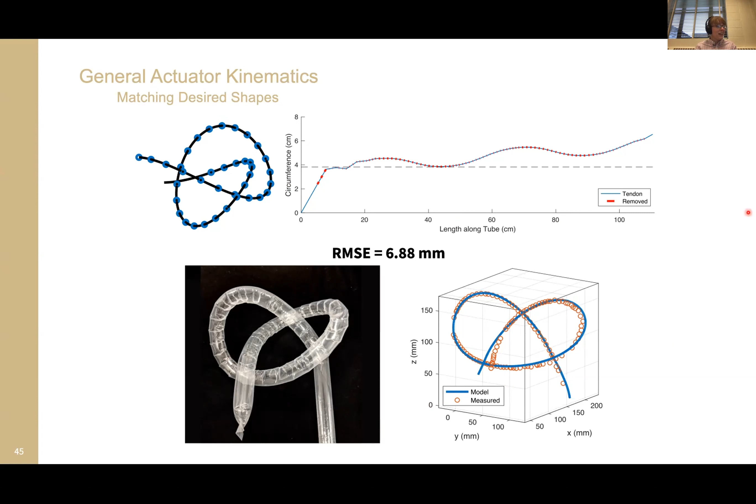But what I want to talk about briefly before I end this talk is some recent work that we've just submitted by one of my students, where we are looking at better ways to do this. So that previous work that I showed with tying a robot in a knot, it works, but it's a little cumbersome on the actual optimization side.

So here we're talking about more intelligent ways to match target trajectories. The main thing that we're doing is we're going to have a shape fit by a Bezier curve. That's going to tell us the shape we're trying to match through some desired points and desired tangents. And then we're going to fit to that Bezier curve with piecewise arcs.

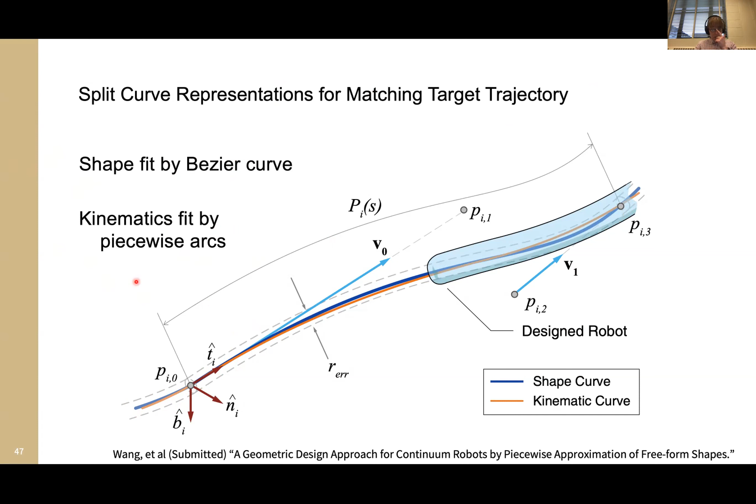Just going through the results here briefly, we are essentially taking that Bezier curve and breaking it down into segments as we need to get the accuracy we need. We can then match in space these arbitrary curves through points fairly well, again, for soft robotic shapes.

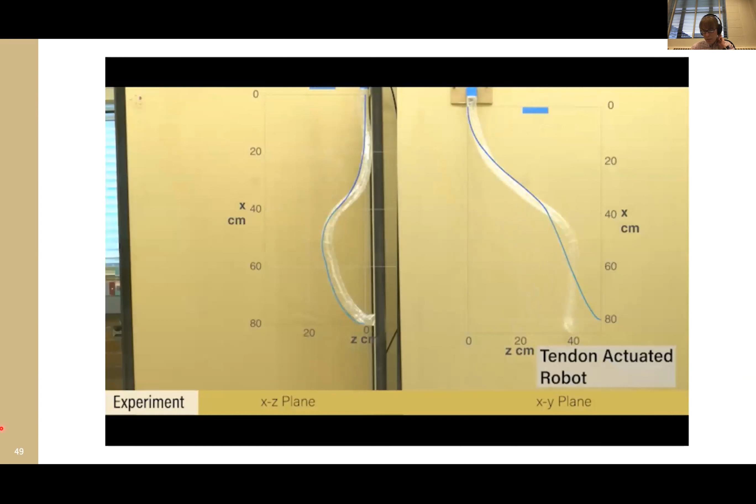With both these preformed shapes and with actuated shapes, we get a little bit of error due to gravity, but overall we are pretty well able to match our target shape in space.

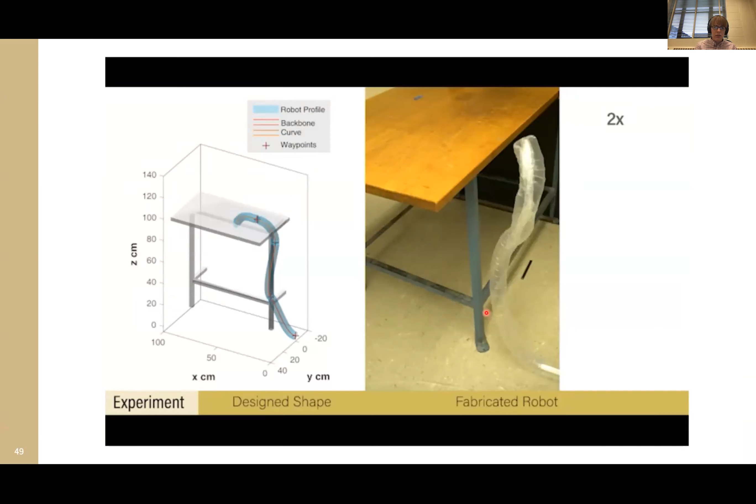So with that, I think I'm just about out of time, so I will finish with just some concluding remarks here. Again, my philosophy here is we can build building blocks for design and modeling for soft robotics through targeted design, observation of heuristics, and decomposition of complex behaviors.

And these creative models are able to predict our behavior well enough to design more complex interactions. Now, the overall accuracy is going to be limited by our assumptions and simplifications made. This is very true in soft robotics. We have to make some simplifying assumptions, otherwise we're going to get locked up in calculations all day.

And in the future, hopefully, I hope we can apply these methods to get some more rapid prototyping and understanding of new soft robotic functions focused on specific tasks.

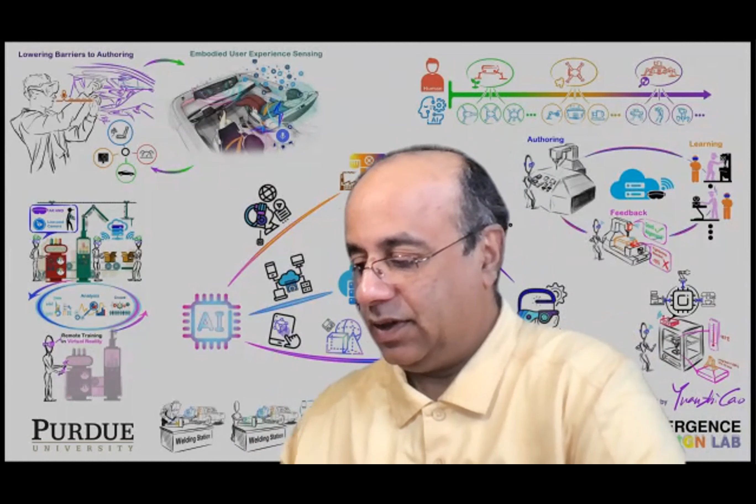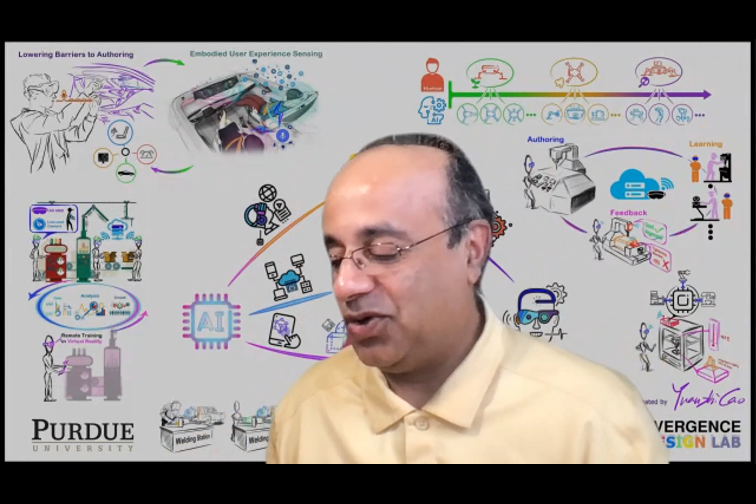So let me start off with my general question. One question I have: both your philosophies of thinking about robots are somewhat different, and there's some commonalities among them. What if you can try to make a more jointed robot, cheetah and exoskeleton that Patrick is working on, with some of the ideas that Laura presented, the more soft ones? Can you make a soft robot become hard and do hard tasks? One of my class projects this time is actually climbing coconut trees. Apparently the coconut trees in India are very tall, that variety, and all the people that cut coconuts, very risky to climb. They've all gone to the Arab countries to work, so they're training monkeys to climb up. And some of your solutions, like this vine climbing robot, could go there and become hard somehow and start cutting the coconuts. So maybe both of you can comment on two sides of your own research on perhaps how we can fill this in-between ground that we all want, to produce robots that can do both sides and be one robot.

I think, at least from my perspective, this is a big thing for soft robotics as a field to figure out. There are big steps needed in building up the control, the modeling, and the sensing expected on the more traditional rigid robotic side, to better merge the fields. I'm not sure the language traditional robotics uses will be the same language we use for soft robotics, but I think we'll need something along those lines to understand how these systems work together.